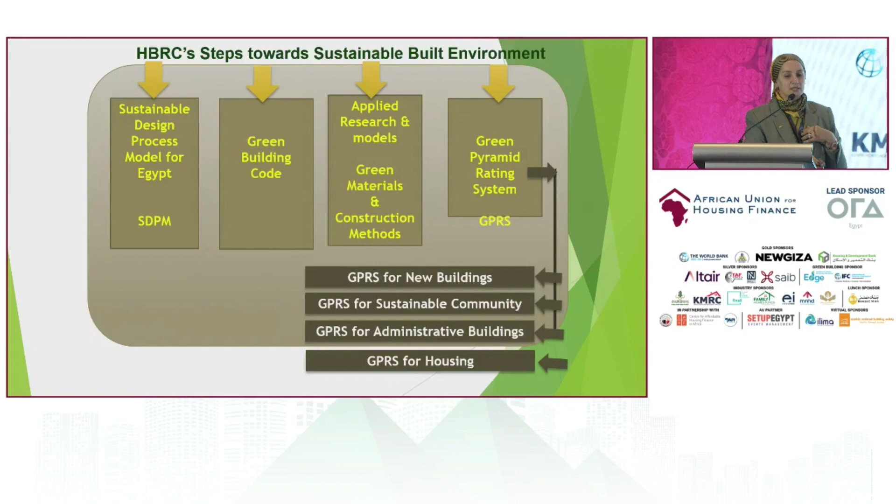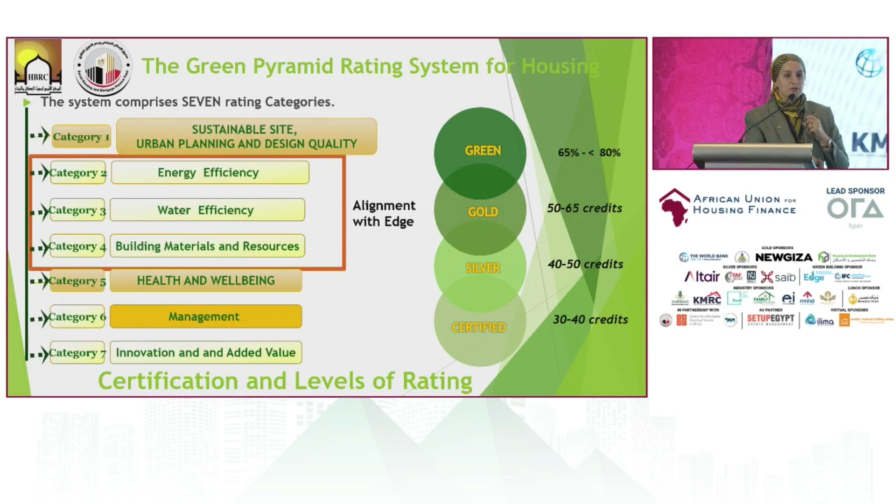And some of the actions, I already presented this morning, the green social housing finance, but here I will stop on the idea behind the green pyramid rating system, because we are tackling the quality of life with energy, water and material efficient resources, because this is the balance that we want to have.

Dr. Hend, you could speak slowly. We are not in a competition anymore. You are not in a competition anymore.

You could speak slowly. So when we are talking about urban planning and design, it's very important that we are focusing on the access to community services, the access to public transportation in all of our green living cities and communities, the health and well-being, and how we have quality control of indoor environmental quality, thermal comfort and daylighting.

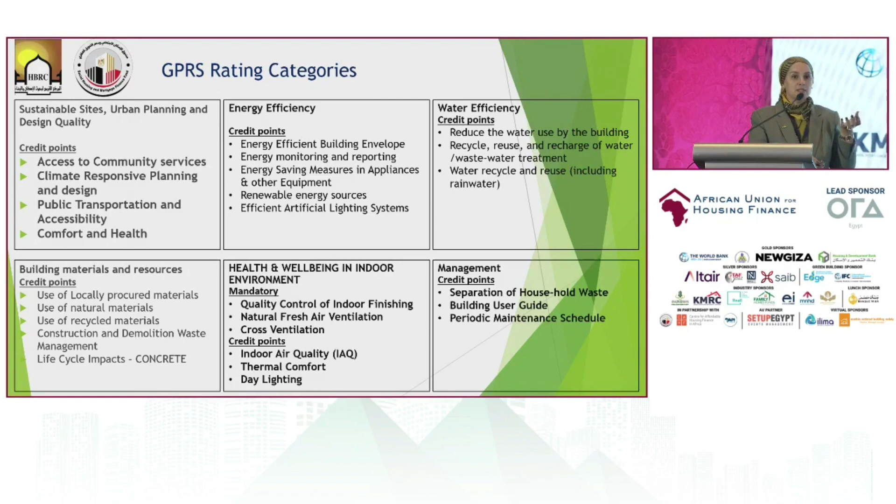A very important issue is management. For the first time, we are focusing in our rating system on management. We are talking about the periodical maintenance check. We are talking about the separation of household waste. We are talking about the building user guide and how to educate our citizens to have their green living style.

Some of our projects, beside the green social housing, which is our key project: for the private sector, for example, we have the Commercial International Bank, CIB Bank. This is an existing building that we finished retrofitting to become a green bank in Egypt, starting from the sustainable site till the management, integrating PV in the facade, integrating grey water for the flushing and also for the landscape.

Another building as well for the CIB. After the success story of the first building, the bank started to convert other buildings and branches to be sustainable.

One of the key projects here in Egypt is the Grand Egyptian Museum, and all of us are looking forward to invite you again to come and visit the Grand Egyptian Museum at the presidential opening. And we finalized the evaluation of the Grand Egyptian Museum with the HBRC to be the first green museum in Egypt. The green social housing.

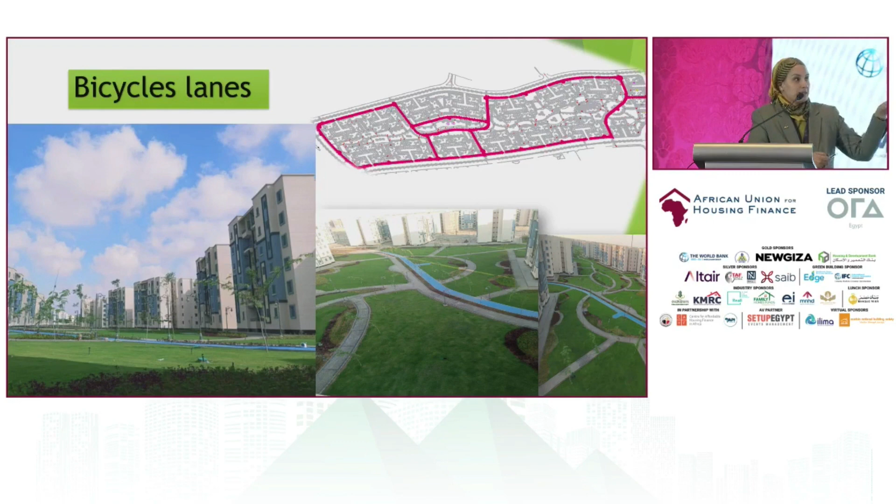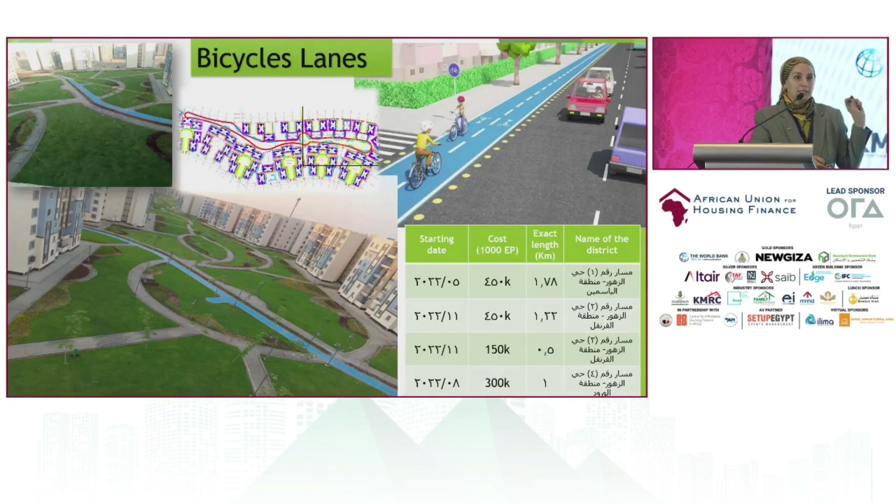I will just stop on the reality, the photo that I didn't have the time to present in the morning. And here we can see the future of our kids. You can see the bicycle lanes. This is the planning of the lanes, and this is the reality. This is where the Social Housing Fund was able to implement it by the table, by the number of lanes, the fund for each lane, and the starting and ending date to establish such quality of life.

The landscape and the greening of the area, because this is the quality of living that we are looking for, and selecting the plants themselves to bear the high temperature and use the minimum water. As you know, Egypt right now is under the water poverty line.

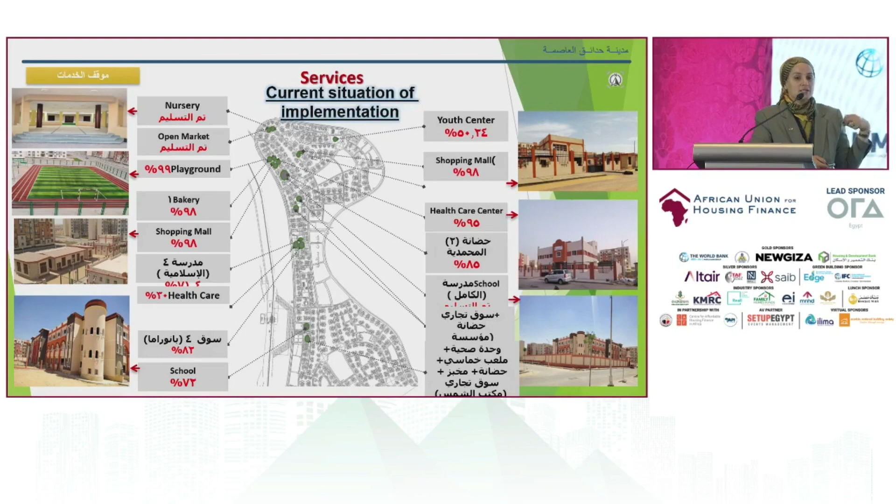Services, as I mentioned, are very important. Before constructing the building, we should take care of services: nursery, schools, bakery, all the daily services that the citizens are in need of, and you will see it tomorrow in our site visit. And this is the first photo of the first social housing unit under the umbrella of green that was finished, and it will host us tomorrow, inshallah.

And always, this is our, let's say, cover photo, where we can see this girl riding her bicycle safely, enjoying the quality of life and the green area in this new city, the garden capital. I will finalize with one of the projects regarding integrating solar systems in all the different sectors: residential, commercial, public sector, tourism sector, industrial, because this is the future, and this is the future of Africa.

The Egypt PV project is implemented by the Industrial Modernization Center and UNDP, and the main issue is to integrate solar systems in all these sectors all over Egypt, and we succeeded to implement 141 solar systems in 16 governorates all over Egypt, with a total of 14.6 megawatts. An iconic project is Cairo International Airport.

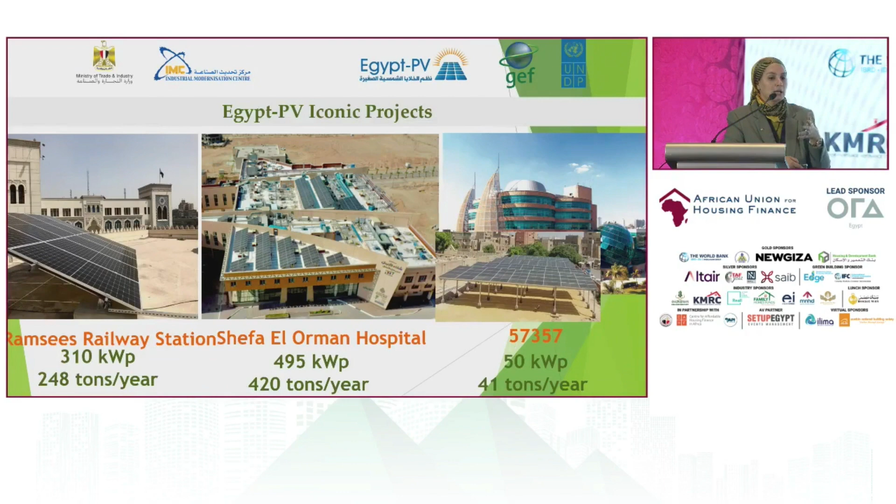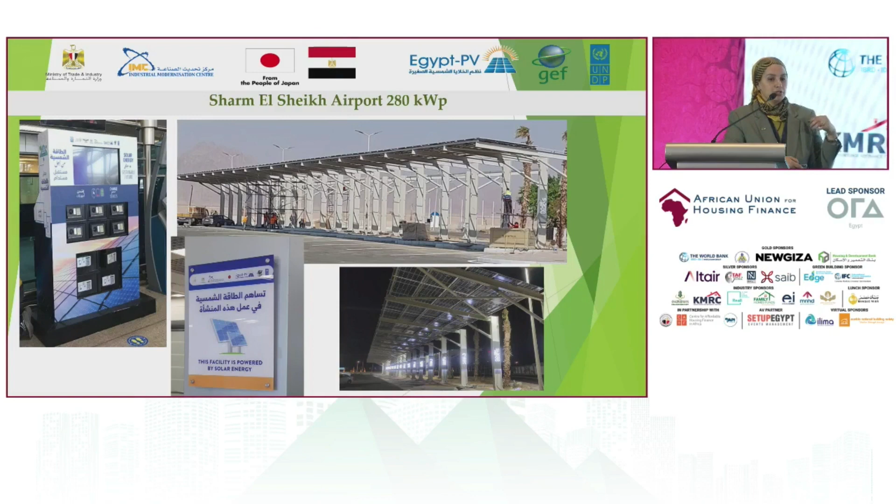All of you will travel from Cairo International Airport. You will see the charger stations for your laptop and mobile, as they take their energy from the rooftop solar station, Sharm Airport and the economic court, and also the hospitals: Cancer Hospital and Shefa El Orman Hospitals, and Sharm el-Sheikh Convention Center. Those who joined the COP for sure managed to see such a facility banner and such intervention for solar systems in the airports and in the convention centers, and in different other factories, tourism sector, hotels, public sector, and the residential sector.

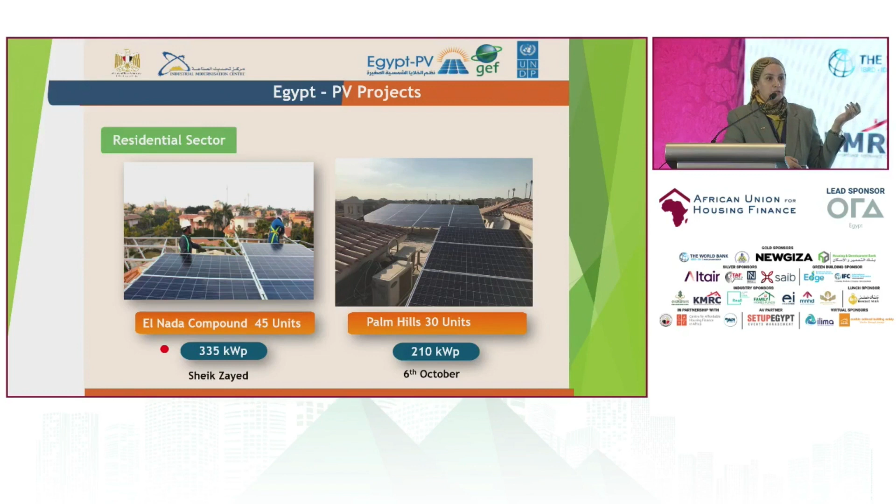We managed to integrate it in compounds in 2 new cities, 6th of October and Sheikh Zayed, and now we are working on green social housing. Last but not least, the new administrative capital, which will be in our site visit, and you will see that it was really part of our green cities, or smart green cities, that we are working on, not only in solar, but in IT, in the building envelope, in water harvesting, and many sustainable features.

I will finalize my presentation: the Egypt PV project succeeded to be the winner of the Low Carbon Award of the AIA Award, which is one of the prestigious awards from the British Institute, in 2020. Not because it's the best project, because we had on the short list very good projects from the Emirates and from other countries, but because of the replicability, the ability to be replicated in other countries in the MENA region and in Africa. Thank you for your attention.

Thank you so much, Dr. Hend. Now we are with Dr. Salah, please. Thank you, Dr. Hala, and good afternoon, everybody. Can I get the presentation, please? Yes, yes. No problem. Thank you. Okay, thank you.

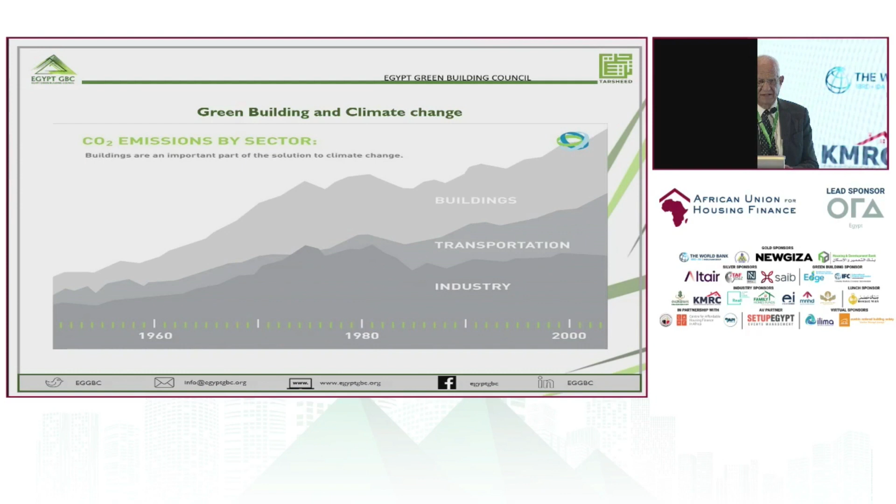Just to give you a history of how green building started. In 1990, the International Energy Agency indicated that the world's primary energy needs would grow by 55% by 2030, which requires about $22 trillion of investment, which is beyond the expected budget of any country, developed or developing. And they did some more analysis, and they found that buildings consume about 43%, industry about 37%, agriculture about 4%, and government and public utilities about 17%, which means the building sector consumes a huge amount of energy.

And therefore, they found there is a need for an initiative, first to reduce greenhouse gases, second to reduce energy consumption, and this initiative was called green buildings. And the first country worldwide that started green building is the UK. In 1990, the United Kingdom initiated the first green building rating system, called BREEAM, and right now there are about 600,000 green buildings in the UK. 8 years later, the United States started with LEED.

Right now, they say they have 8 rating systems, but the first one was LEED, and LEED is very famous worldwide, by the way. And if you try to see statistically, in the United States, there are 1.6 million green buildings certified with LEED in the United States. And there are about 40,000 shopping malls certified with LEED, and the most important part, there are more than 200,000 green experts, which means green building can also provide a lot of job opportunities.

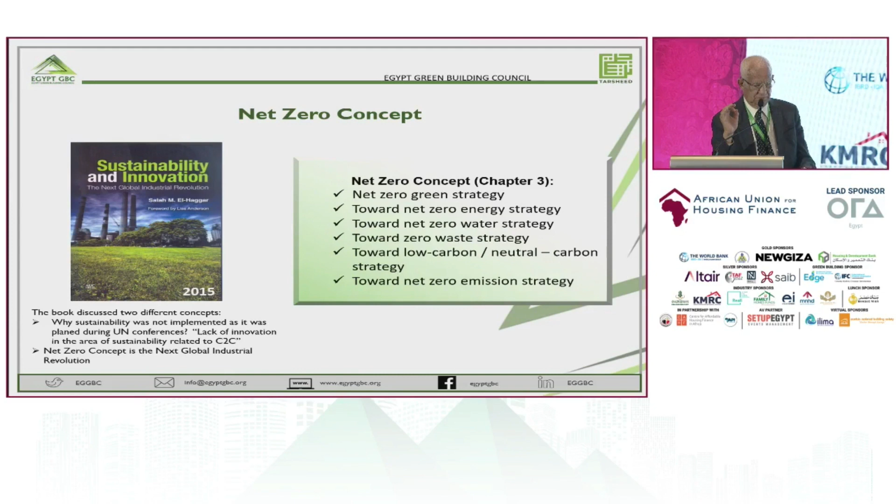Now, when we talk about net zero green strategy in general, it means in equal out, means all emissions and waste have to be utilized. Just quickly, net zero waste strategy is exactly the same as cradle to cradle, if you are familiar with cradle to cradle, developed in 2001, where we are going to recycle 100% of our waste. Some people call it net zero waste, or sometimes zero waste or circular economy.

Net zero water strategy: mainly we have 3 main elements in the net zero water strategy, which are water saving devices, gray water utilization, and black water utilization. Of course, I will try to go quickly about this net zero concept because this is very important worldwide to save our natural resources.

Net zero energy strategy means you are producing enough energy to run the building. We have one building, we have a number of buildings. So far, I think we have almost 10 buildings with net zero energy worldwide. But we have one building in the United Arab Emirates which is a net positive energy building, where they generate more energy than they use to run the building, and the rest they sell to the municipality. Of course, net zero emission strategy was already discussed in COP26 as well as COP27.

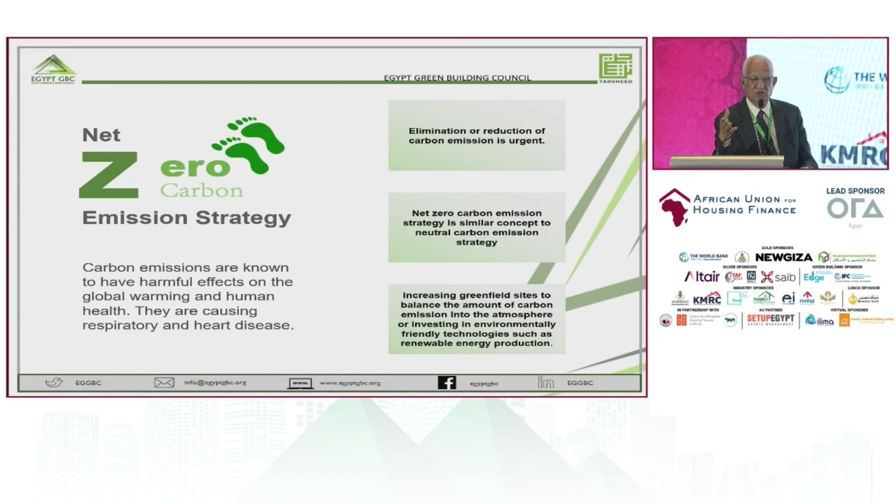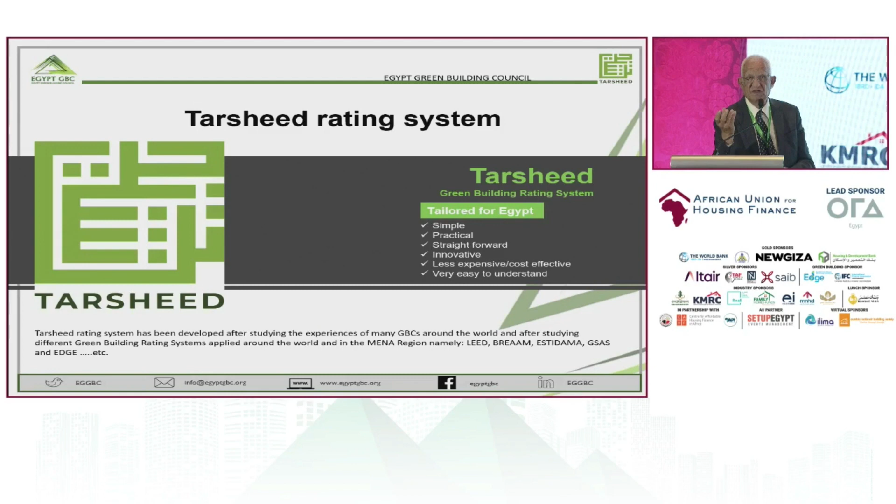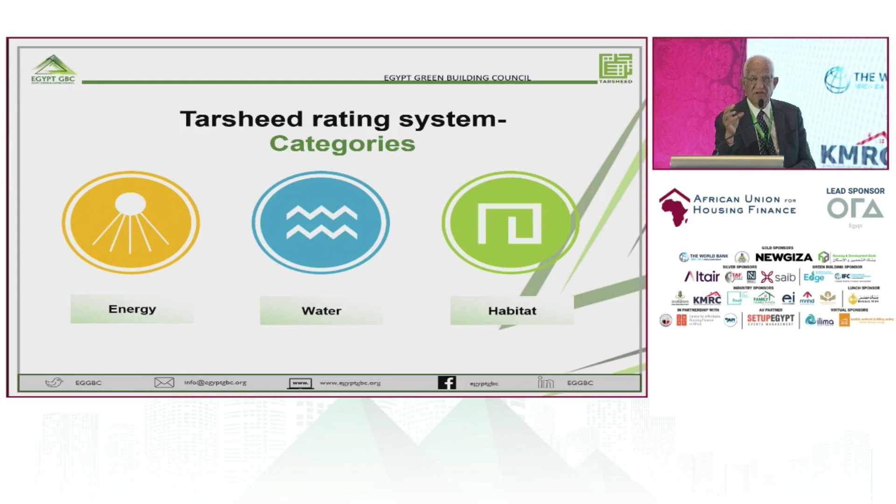Now, so far worldwide, there are 10 rating systems where they address the concept of net zero in the rating system, and Tarsheed is one of them. Now, the Tarsheed rating system, as I mentioned before, is a very simple rating system for buildings and communities. It mainly consists of 3 main elements: water, energy, and habitat. Other than water and energy, everything is included within the habitat category.

Now, in 2015, we issued the Tarsheed Affordable Buildings, which was developed in 2014 and published, and it's available in all bookstores in 2015. Again, it's very simple, very cost-effective, and simple to implement. And then in 2018, after I authored the book about net zero, we decided as Egypt Green Building Council to have a rating system based on net zero.

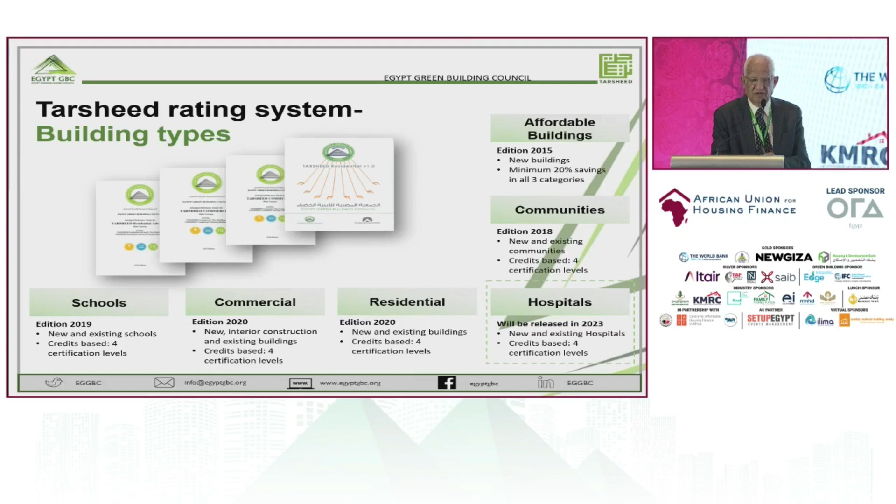And then in 2018, we issued Tarsheed Communities. But within Tarsheed Communities, there is a prerequisite called green building. And therefore, we decided to have also a green building rating system based on the net zero concept. And therefore, we already issued Tarsheed Schools, Tarsheed Commercial Buildings, and Tarsheed Residential Buildings for existing and new buildings. And we are in the process of releasing Tarsheed Healthcare Facilities.

Tarsheed is already based on 4 categories: bronze, silver, gold, and platinum, depending on how many points you can collect. At the same time, within the Tarsheed rating system, there is a prerequisite, which I always feel is very important to develop some kind of vision for the future regarding sustainability.

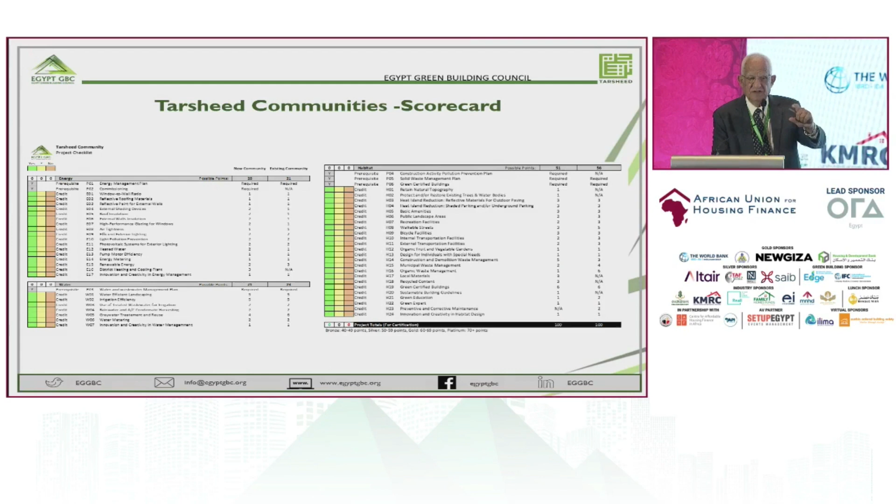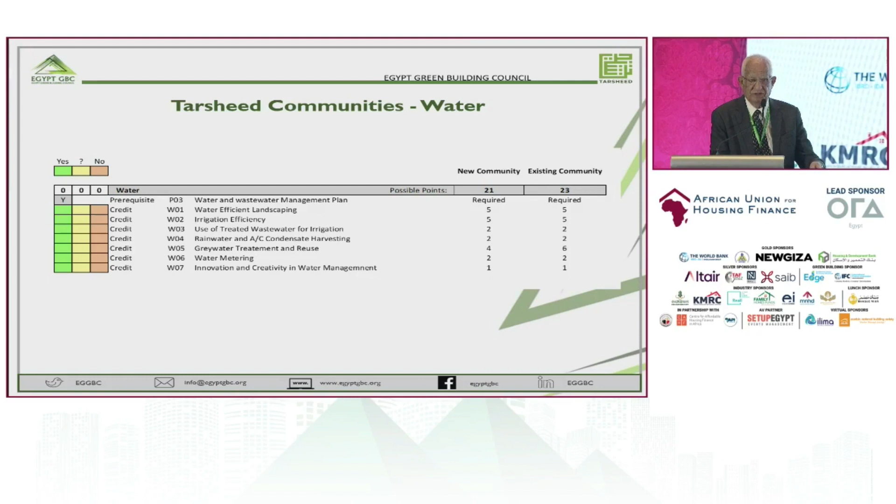That is the Tarsheed communities, again based on these 3 elements: energy, water, and habitat. This is the energy scorecard, and I will not go through all these details. This is the water scorecard, and this is the habitat scorecard.

In conclusion, green buildings can contribute to 9 out of 17 sustainable development goals. That's number one. Number two, the Tarsheed rating system is very simple to implement and cost effective. We did a study about a year ago: the extra cost when you apply Tarsheed to affordable buildings ranges between 20 to 25,000 pounds, which is almost nothing.

Therefore, it is based on logic and on simple, innovative techniques to be implemented without any extra cost. One example, which we did a few months ago: one of the rural villages in Aswan, called Farouh village, in cooperation with the Ministry of Planning, we were able to convert it into a green rural village.

This is the first rural village converted to green in Egypt, and I think worldwide, because a rural village is very difficult to convert into green, but we were able to convert it. They received the certificate about a month ago, and during COP27 we celebrated with the Ministry of Planning the issuing of Tarsheed communities for the Farouh rural community.